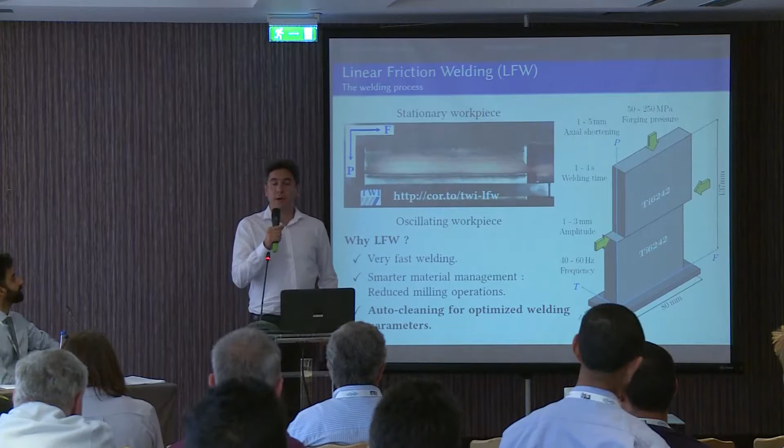And first, I would like to say a word about the process. So we have two work pieces. One is fixed, and the other is describing an oscillatory motion. After a fraction of a second, we apply enough pressure force in order to get a sound weld.

Why is it interesting? Well, it's a very fast welding process. We can perform dissimilar welds, and for optimized welding parameters, we can get an auto-cleaning process.

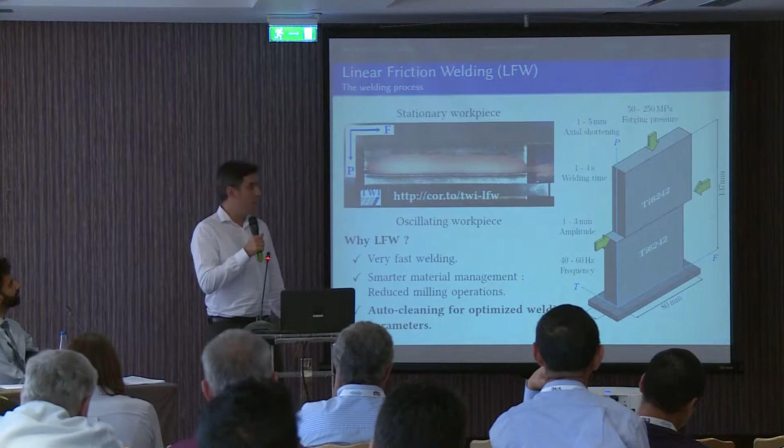Please notice the axis I have chosen as the frame of reference: F for the friction direction, P for the pressure direction, and T for the thickness.

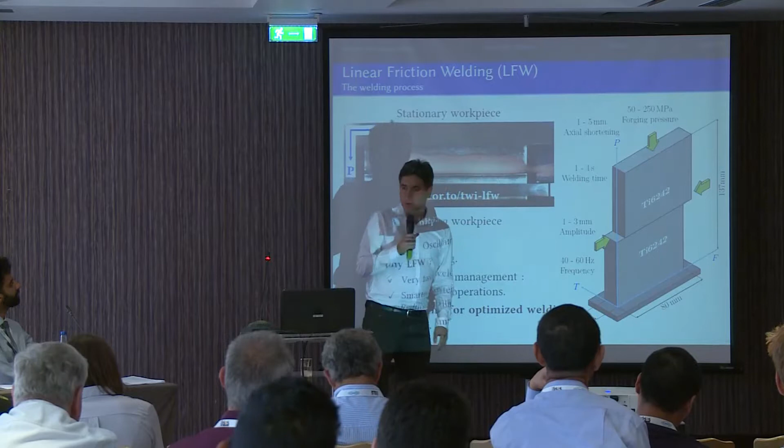Some applications: here you can see that the mechanical fixations of the blades of the turbine disc have been replaced by linear friction welding. Just to be clear, this Garcia here is not me. We're a huge family all around the world, and we are all very passionate about fracture mechanics.

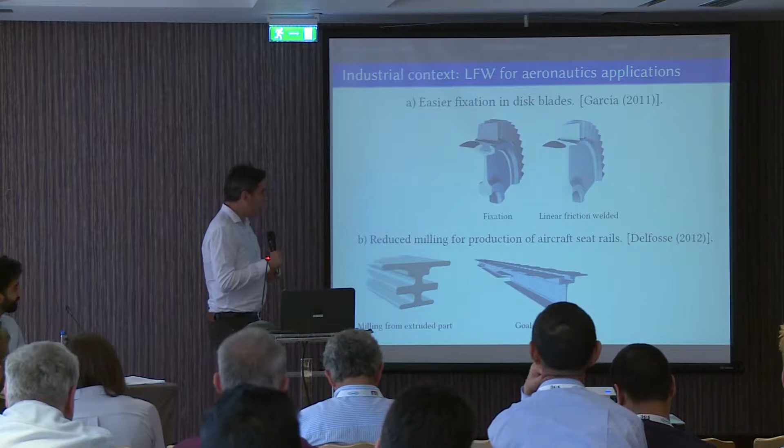In the second application, to get the wings in this structural beam, we would extrude the complex profile and after very extensive milling, get our workpiece. What we propose instead is to make a simpler beam and add the wings by linear friction welding.

As you can see, these beam applications work under strong mechanical solicitation and loadings, so the mechanical properties need to be known.

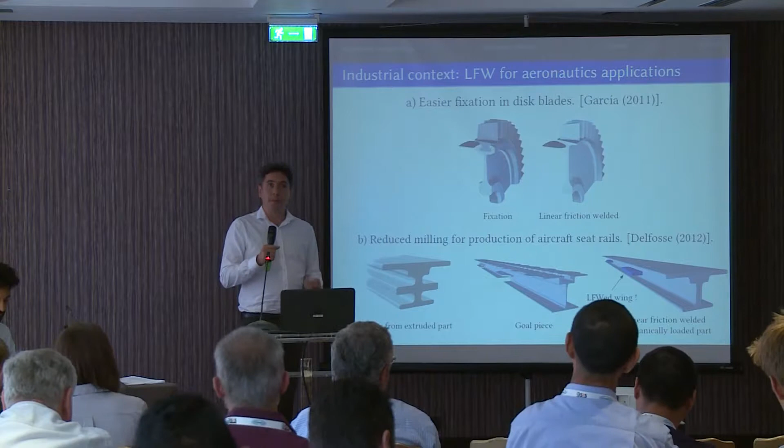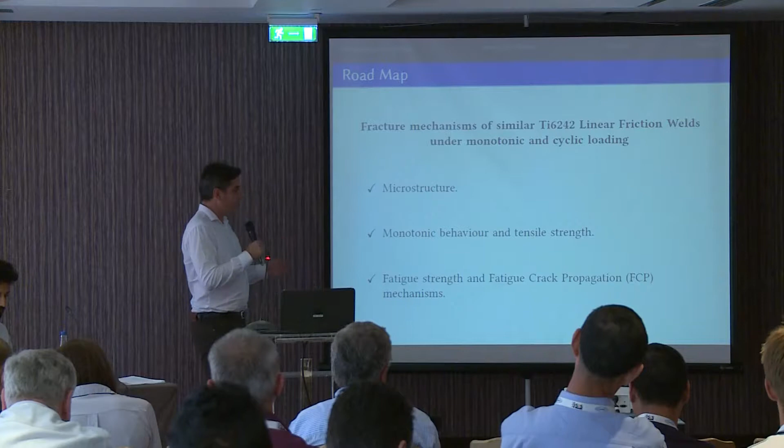This leads to the roadmap. Recalling the title of this presentation, we're going to study the microstructure, the monotonic behavior and tensile strength, the fatigue strength, and the fatigue crack propagation mechanism.

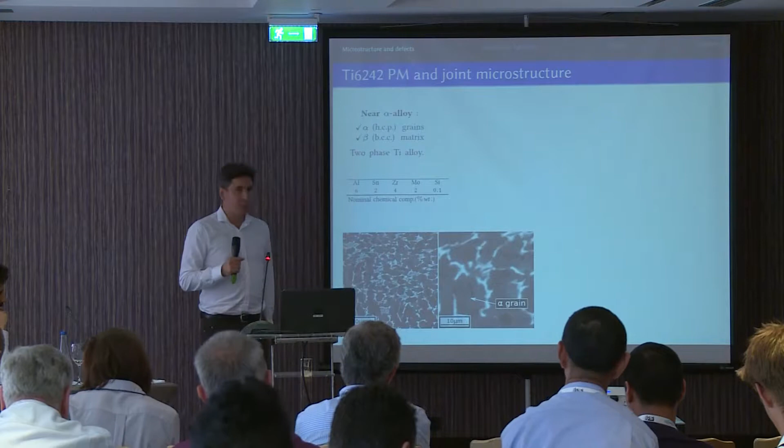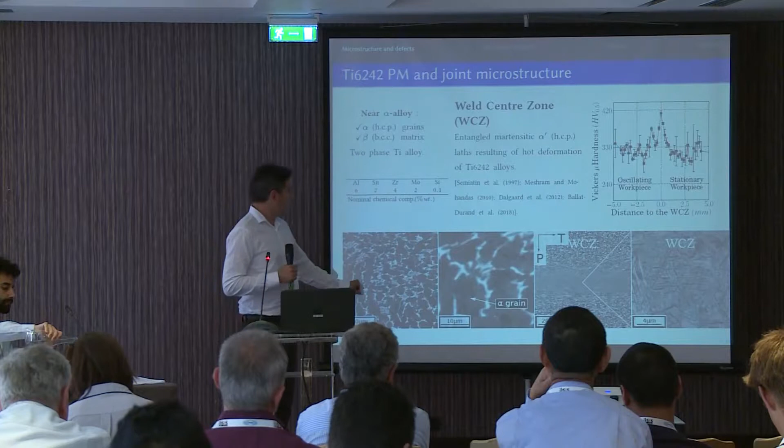The first question: what is the effect of the weld? As you can see here, we have produced what we call the weld center zone, with a very fine alpha prime entangled acicular microstructure, which shows an increased micro hardness. This increased micro hardness suggests a higher tensile strength.

So if we were to do a tensile test, we should wonder where the fracture should take place. Here we have parent material samples and cross-welded samples, with a gauge length of 25 millimeters and cross-section of 18 square millimeters.

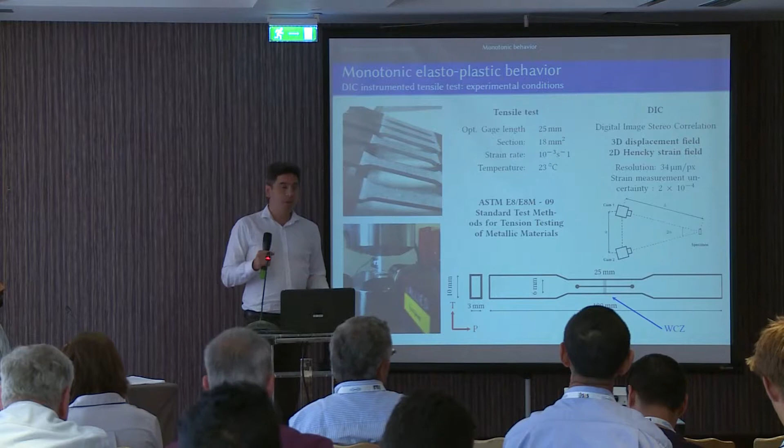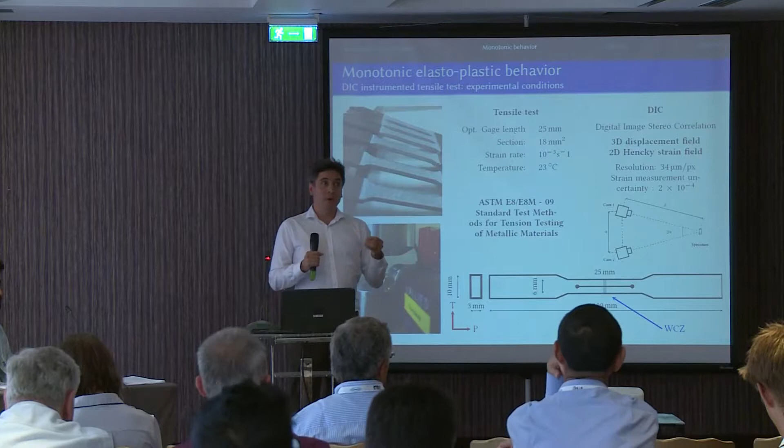We have instrumented the tensile test with a digital image stereo correlation system. If you do not know this technique, don't worry, I will be happy to give details at the end of the session. For now, I'd like you to know we are going to get the 3D displacement field and the 2D strain field on the surface of the specimen, allowing the local behavior to be studied.

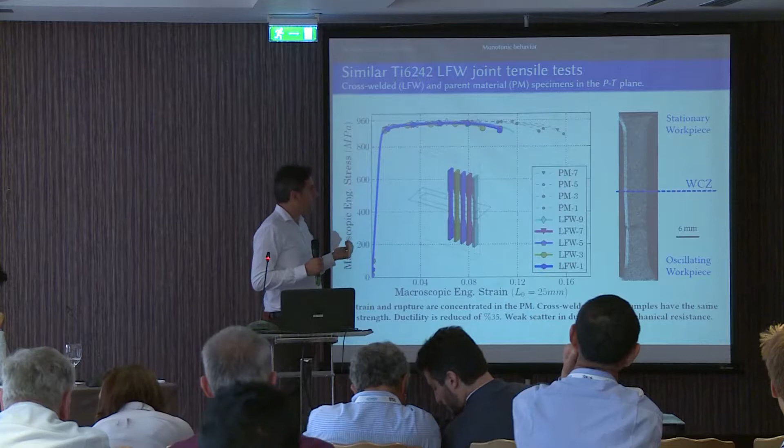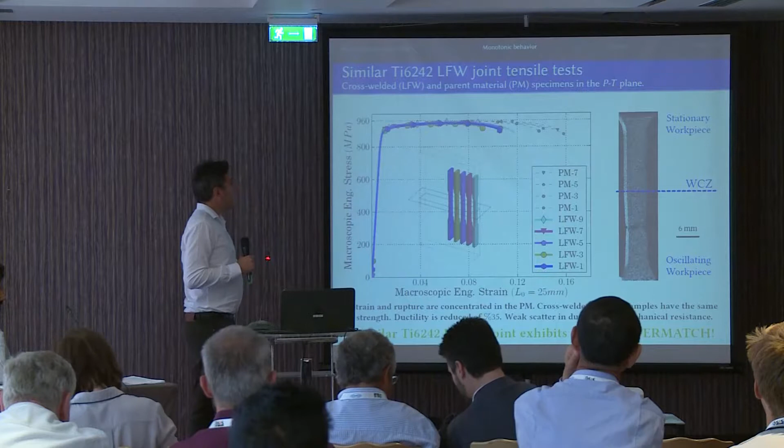First, the tensile test results. We have in colors the cross-welded specimens and in gray the parent material specimens. As you can see, the ultimate tensile strength is the same for both sets of specimens at 900 megapascals. The ductility for the cross-welded specimens is reduced, and failure takes place far away from the weld. So our second conclusion: similar Ti6242 Linear Friction Welds exhibit a weld overmatch.

Now we are going to study the local behavior. On the right we have a picture of the specimen with a blue rectangle which shows us the strain field on the surface of the specimen. We have the weld center zone here in the middle.

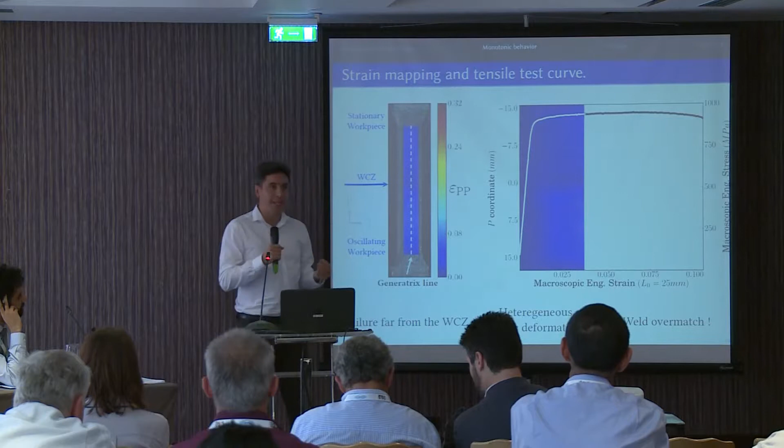As we pull, for every level of macroscopic engineering strain, we map in vertical lines the cumulative strain field along this generatrix line. This gives us a so-called spatial-temporal graph, allowing us to study the strain history of this line in a 2D graph.

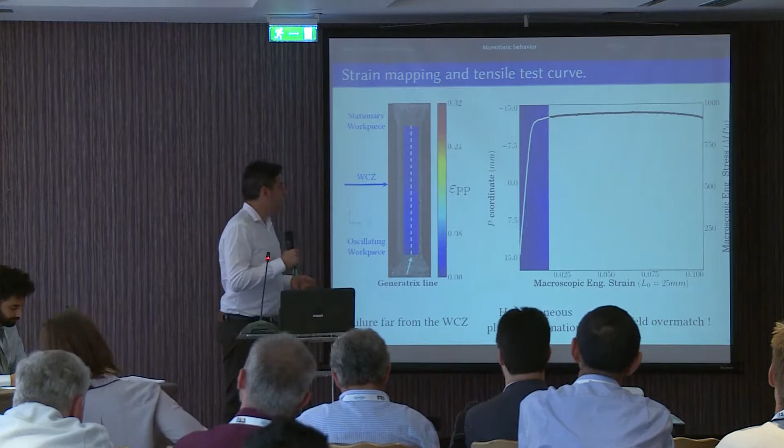With the strain field, we confirm that failure takes place far away from the weld, and we see the plastic deformation, which is very heterogeneous. This information shows us the accumulated strain.

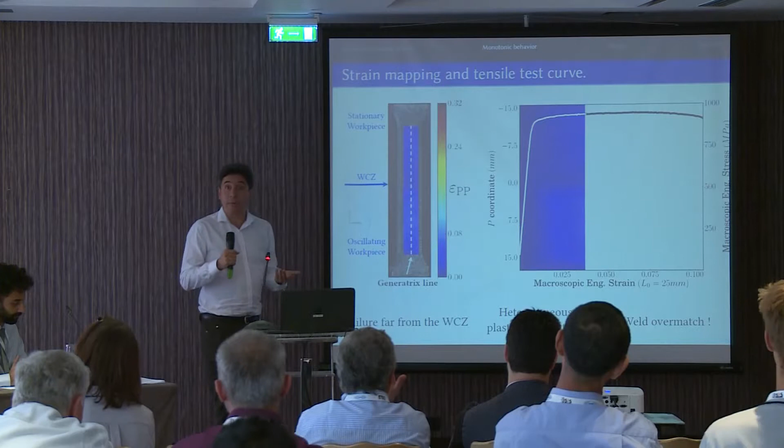But if we were interested in studying instantaneous activity, we should take another variable: the strain rate. Here we have, once again, the spatial-temporal graph for the strain rate. Please notice that I have normalized the strain rate by the maximum strain rate on every line.

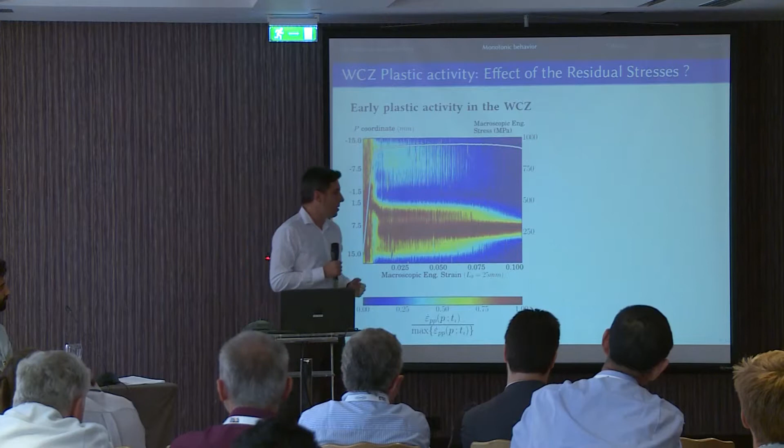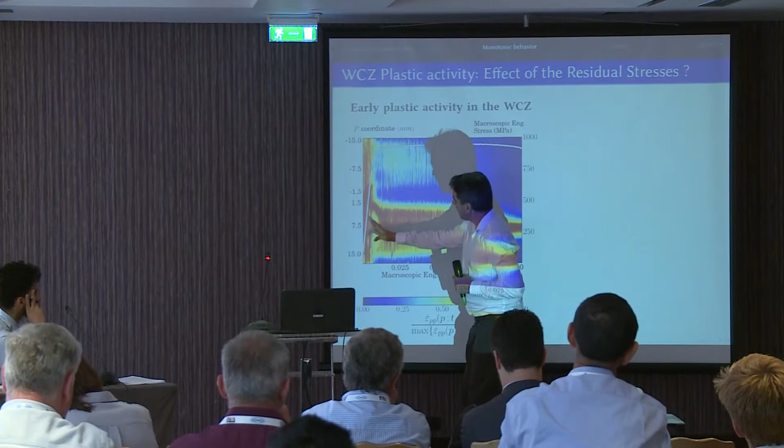For example, let's do the exercise: when the macroscopic engineering strain is 0.05, the maximum strain rate is located at more or less 10 millimeters. So we confirm once again localization and weld overmatch. But if you look somewhere here, when we quit the elastic domain, some activity is observed at 1.5 millimeters away from the weld.

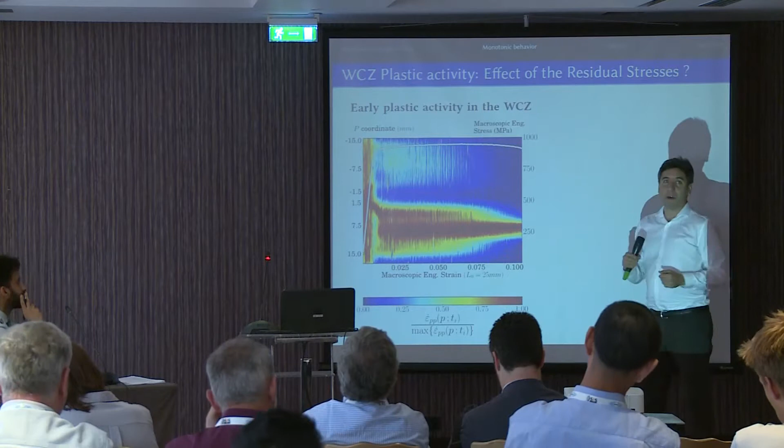And this is very astonishing, because, as we said before, we have a weld overmatch. Failure takes place far away from the weld. Nevertheless, the first steps of plastic activity take place in the surroundings of the weld, so the question about its origin may arise.

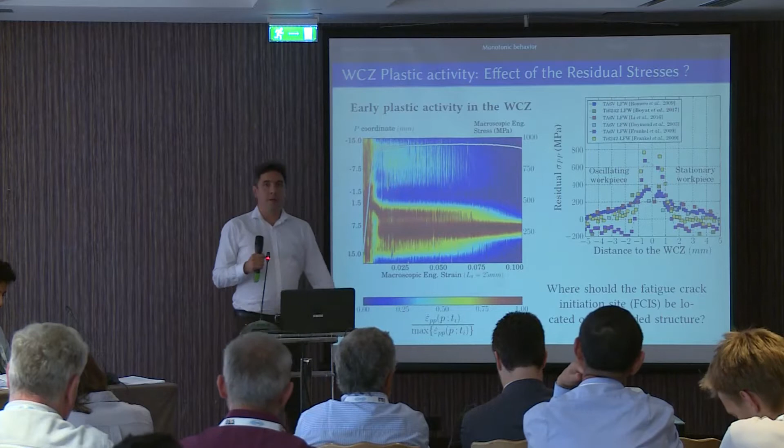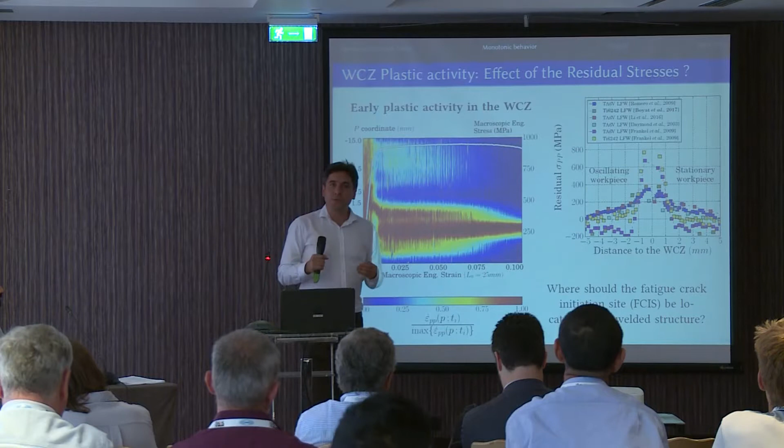Well, it is weld. Welds are known for having residual stresses. As you can see here in literature, we have found a certain agreement about the presence of residual stresses in the weld center zone. But a more interesting question, now that we have established the localization of the first steps of plastic activity, is where do the fatigue crack initiation sites take place during a fatigue test?

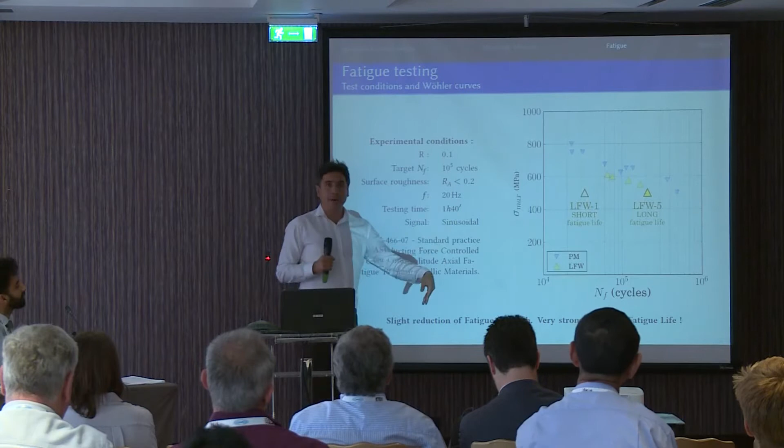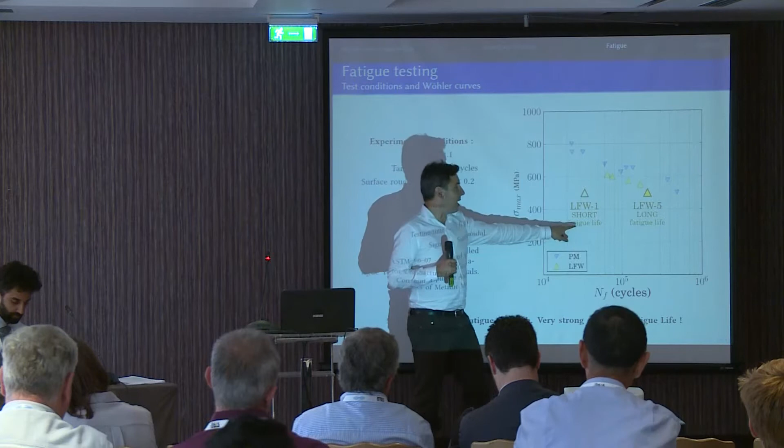But if we take a look at the cross-welded specimens, we can see that it's compromised with a very high fatigue life scatter. For instance, these two specimens, 1 and 5, were tested at the same stress level, but the life is very, very different. So we have a short life specimen and a long life specimen, the 1 and 5. So we're testing a cross-welded structure in fatigue.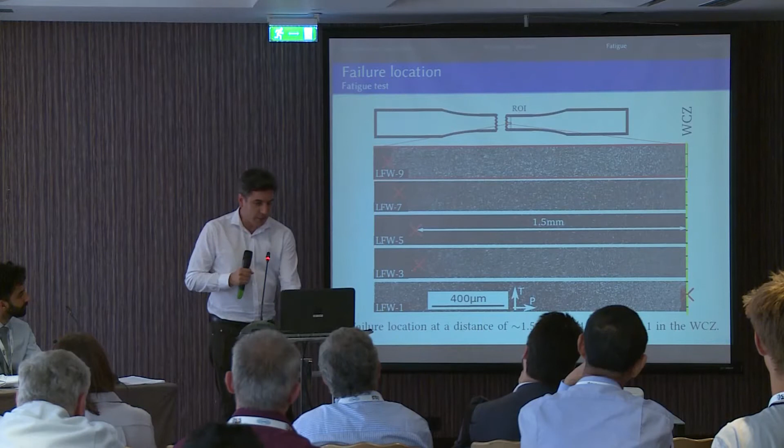So we have 2 different localizations. We'll study the fatigue crack mechanism for the first specimen, the one with the long life, the one that broke far away from the weld. And what we can see is fatigue ridges that converge to several points on the surface of the specimen. We can see it here also. And this could be explained by the fact that we have residual stresses.

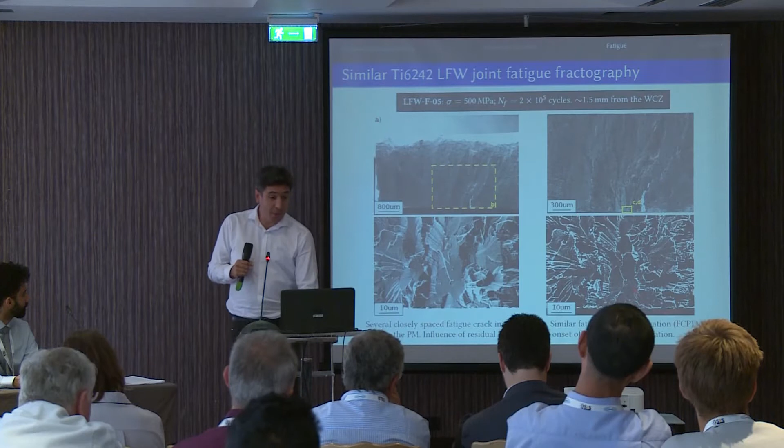So maybe the stress was enough to activate several crack initiation sites at the same location. And if we look closer, we can recognize these features that convey the shape of the alpha grains. So we observe the stage 1 fatigue propagation. Now we're going to look at the short life specimen, the one that had a very short life, and we can see that the fatigue ridges converge to a line in the center.

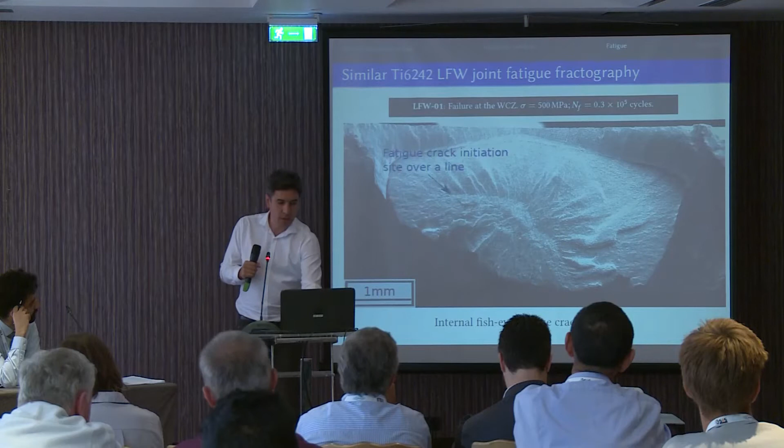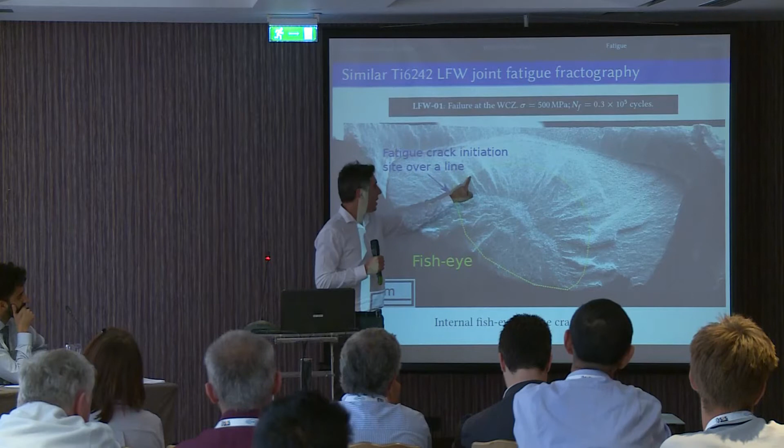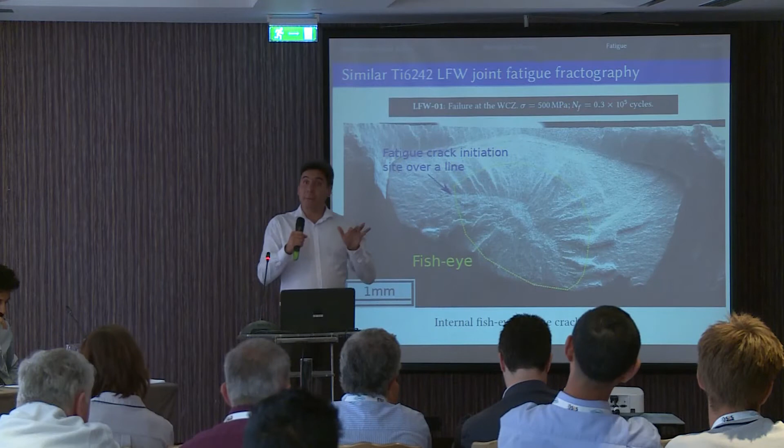So we have the fatigue crack initiation site over a line, and if you pay attention, you can see that the roughness of the fatigue ridges is smooth until this line, and then it becomes rougher. How can we explain this? We can imagine that, given it is internal, the crack propagation happens in vacuum until it reaches the specimen surface. And there, the air can enter, and it's going to change the environment conditions, so now we have propagation in air conditions.

So we are going to take a look closer. As a reminder, we're talking about the specimen that broke at the weld center zone. If you remember the morphology of the microstructure at this location, you should be surprised, because these features here do not look like the microstructure we were supposed to find here. These features convey the shape of a dendritic defect. It seems like locally the temperature during linear friction welding exceeded the melting point, and so we have the dendritic defect.

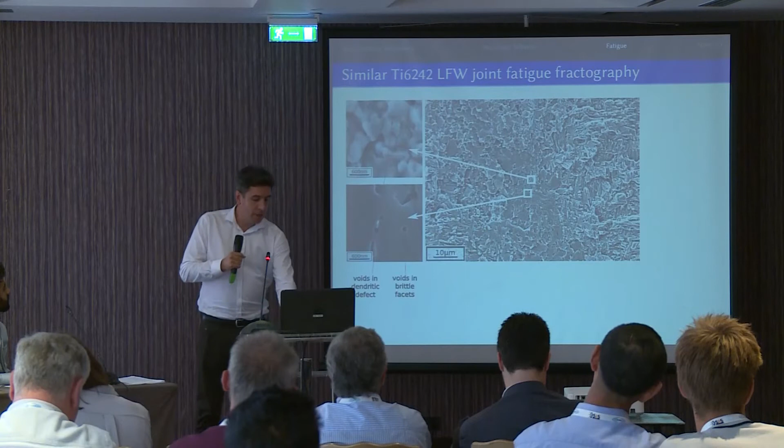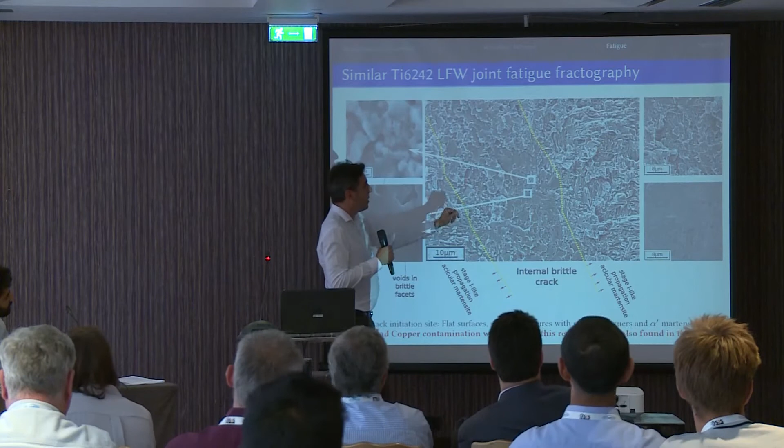In the surroundings of these defects, we have facets that suggest a local brittle fracture, so we have a very flat surface on the surroundings of this dendritic defect. So we can imagine that we have created an internal crack. And if you look at both sides of this internal crack, we can recognize the shape and morphology of the microstructure, so we are in the presence of a crystallographic propagation.

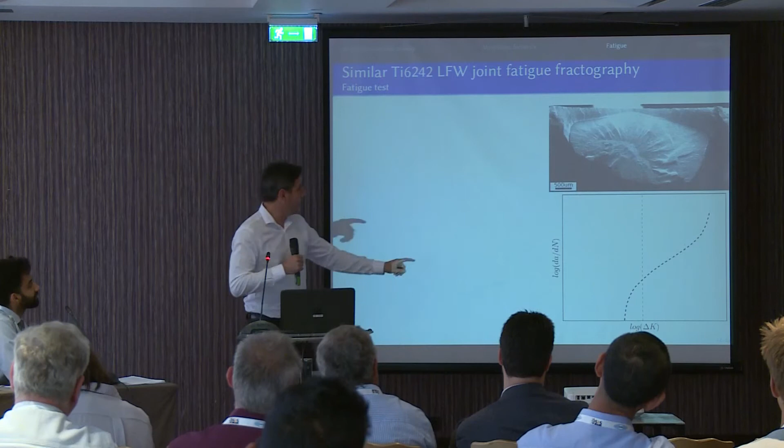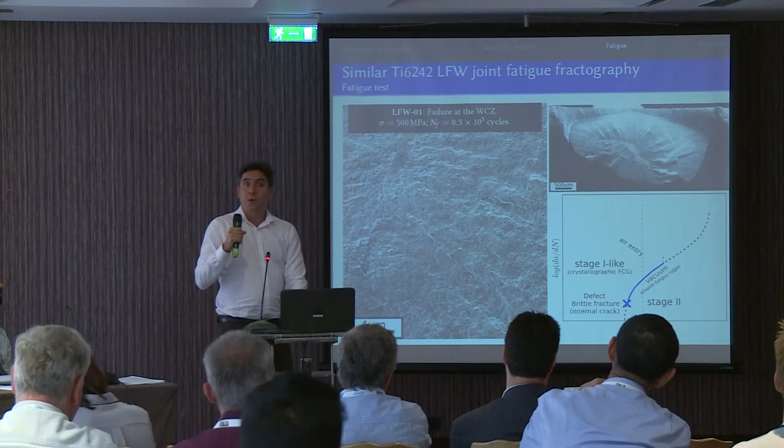This is the stage 1-like fatigue crack propagation. So now we can imagine the fatigue crack propagation scenario. This is going to be a schematic image; I have not measured the crack propagation rate. So we have the brittle defect, we have a brittle fracture in its surroundings, we have the fatigue crack propagation over the martensite. We have fatigue propagation stage 2 in vacuum until the air comes in, and finally we have a ductile final rupture. This is very interesting because we have several mechanisms in the same specimen.

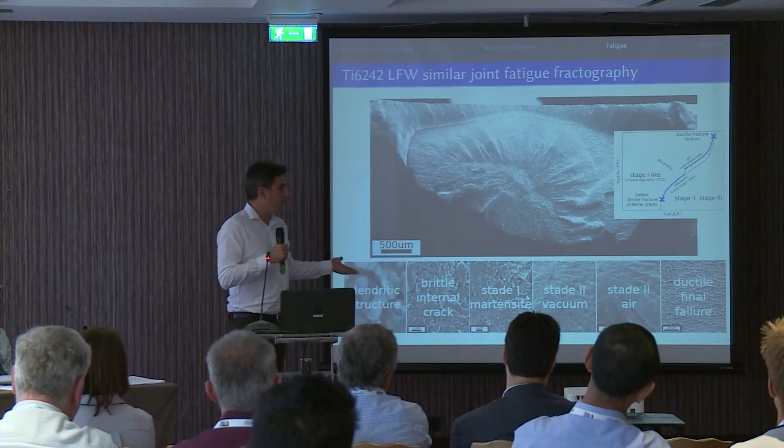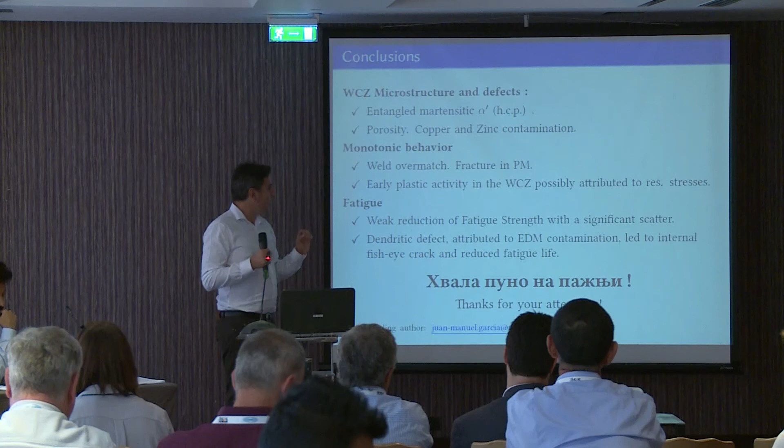So to sum up, we have characterized the microstructure. We have found some defects like porosity, copper and zinc contamination. We have a weld-overmatched fracture that takes place in the parent material. We have plastic activity in the weld center zone, which is probably attributed to residual stresses. And for fatigue, we have found a slight reduction of fatigue strength with significant scatter. This dendritic defect was attributed to contamination prior to welding that led to an internal fisheye crack and reduced life.